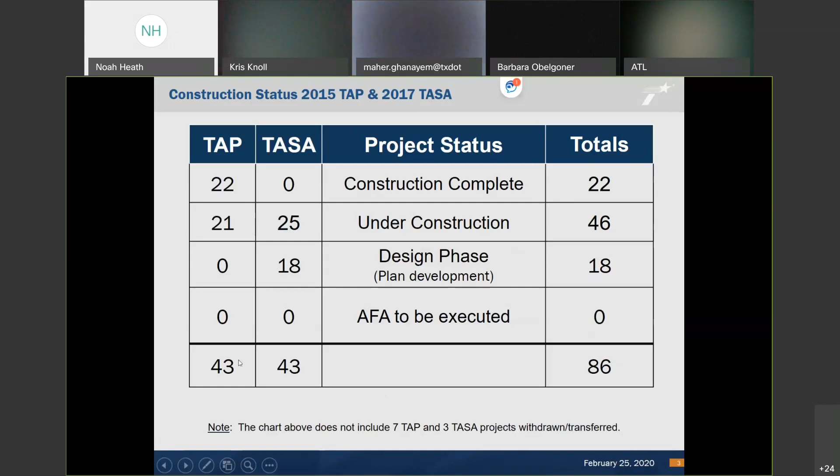Next slide. For any project that is going to let after August of this year, we need to make sure it gets into the FY 21-24 STIP. That's a new STIP, so any project that hasn't let by this August needs to be added into the new STIP.

The eSTIP portal deadline is June 22nd, and all of our projects included there must be addressed in your TIP or STIP public involvement. If you have rural TIP meetings or public meetings, please be sure these projects are individually listed in that TIP and STIP. We want to make sure the entries in the eSTIP portal for the FY 21-24 STIP match what was in the previous STIP, the FY 19-22 STIP, exactly.

We want it to look exactly like it did before because it was approved by FHWA that way, so we don't want to introduce any changes unless there was an approved modification to your scope. That needs to be captured, so let us know. We'll be reviewing all TIP and STIP entries for our projects in the 21-24 STIP and will contact you if there are questions. This is really important, especially for those of you in MPOs, to work with your MPO to ensure these projects are captured in their MPO TIP as well.

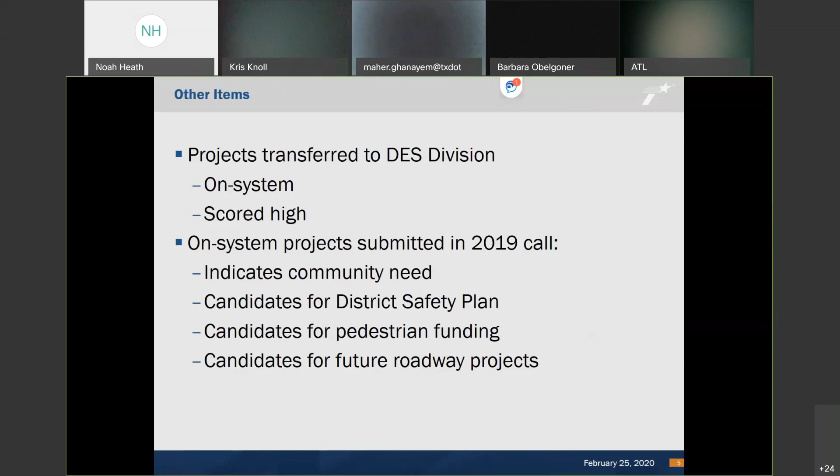Okay, I'll take it from here. This is Noah.

First, we wanted to revisit the project initiation timeline. This is the general project implementation timeline over the next year, with a target date of full execution of these projects, AFAs, by November 1st, 2020. You can see that there's some overlap. I'm not going to read through all of the items, but there's overlap for each because depending on the MPO or the specific situations of that project, it may fall under a different STIP cycle or whatever the MPO TIP deadlines are. So there will be a little overlap, but the overall target for all projects is November 1st, 2020.

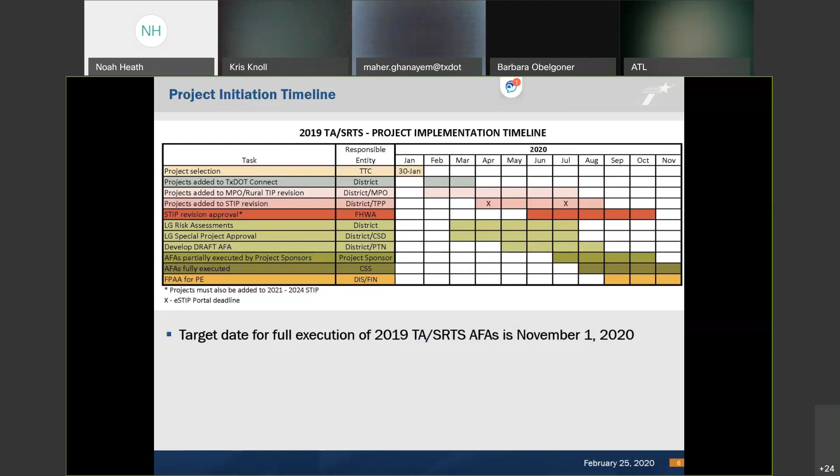This presentation is focused on the gray, so the second line, the TxDOT-Connect. So we'll be talking about how to enter your projects into TxDOT-Connect for this funding. Our goal is to have all projects entered into TxDOT-Connect by the end of March.

We'll be providing tools to help with this, get everything entered into TxDOT-Connect, and then also providing a spreadsheet, or I'll just read through each of them. We'll be providing a guidance document by the end of this week that'll go into detail. It'll be similar to this presentation, but it'll provide a lot more detail on how to enter projects into TxDOT-Connect. And then it will provide additional information for the next steps in project initiation.

So local agency project procedures, risk assessment, special approval, economic disadvantaged counties program - there's several projects that have that EDCP funding. So it'll give detail on how to proceed with those projects, the TIP and STIP, advanced AFAs, and then the federal project authorization and agreement.

We'll also, another tool that will be used when entering the projects into TxDOT-Connect is the final detailed application. We'll talk about the fields that are helpful when you're entering your project into TxDOT-Connect. We're creating a project initiation checklist for these projects, so it'll help make sure that you guys don't miss any specific items along the way. And then also we'll be providing spreadsheets that'll have the cost breakdowns for TxDOT-Connect, the STIP, and then the AFA, because they're all a little bit different and they don't quite match. So we're creating spreadsheets that will give you the numbers for your project so you know exactly what to enter in each area. And then AFA templates, we hope to have those finished by mid-March.

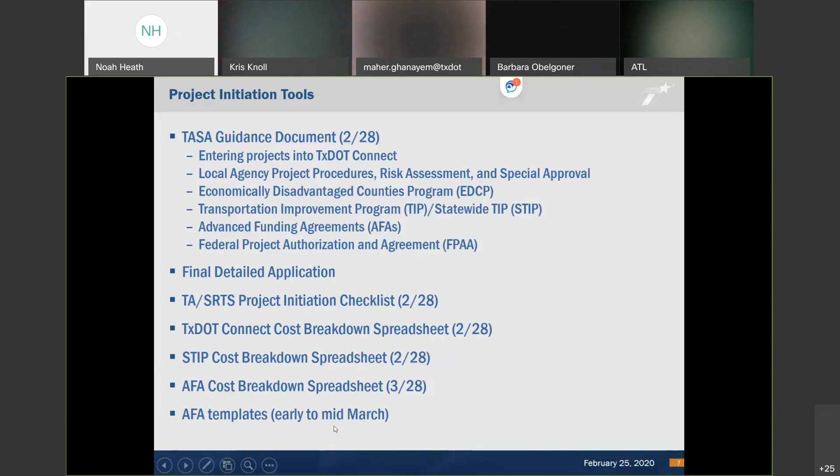So I'm just going to talk briefly about the tools that we'll use for entering projects into TxDOT-Connect. The detailed application, the important pages to look at for the detailed application is the cover page that PTN created, which has the updated project description and project name. So you'll want to look at that whenever you're entering your project name into TxDOT-Connect, and then also the from and to limits, and then the project description.

One important thing to note is to know the funding source for the project, because some of the project names actually have SRTS in the name, or Safe Routes to School in the name, or school sidewalks, because Safe Routes to School projects are a category of project under transportation alternatives. But then we also have Safe Routes to School funding for Safe Routes to School projects.

So you'll see Safe Routes to School projects under both funding sources. It's important to know that funding source and not assume it's a Safe Routes to School funded project just because it has that name in the project title. It's a bit confusing, but if you think of the project in terms of its funding source rather than its name, that may help.

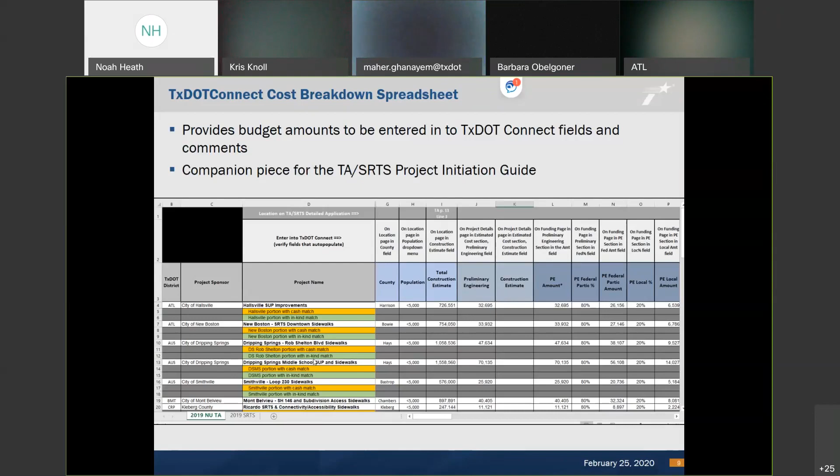So this is the cost breakdown spreadsheet for TxDOTConnect, and I'm going to pull it up so you can get a better look. There's a tab for non-urban TA projects, and another for Safe Routes to School projects. Each project is listed, and the first row shows where that information is in the detailed application, while the second row tells you which field in TxDOTConnect to enter that information into. The third row is like a column title or field title for the spreadsheet.

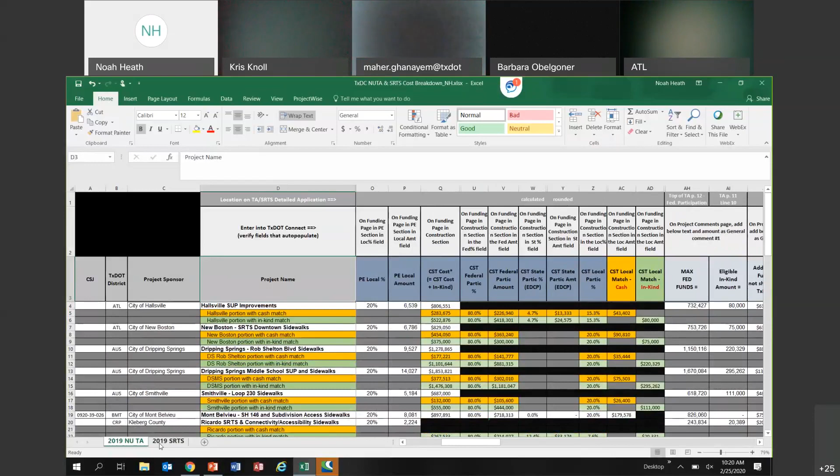You can see it has the PE amount, and if you scroll down, it'll give you, for the funding page, the field entries for each funding line that you'll enter. We're hoping this will be a helpful tool that consolidates all the information you need from us to enter into TxDOTConnect. Again, there's a tab for non-urban TA and one for Safe Routes to School projects.

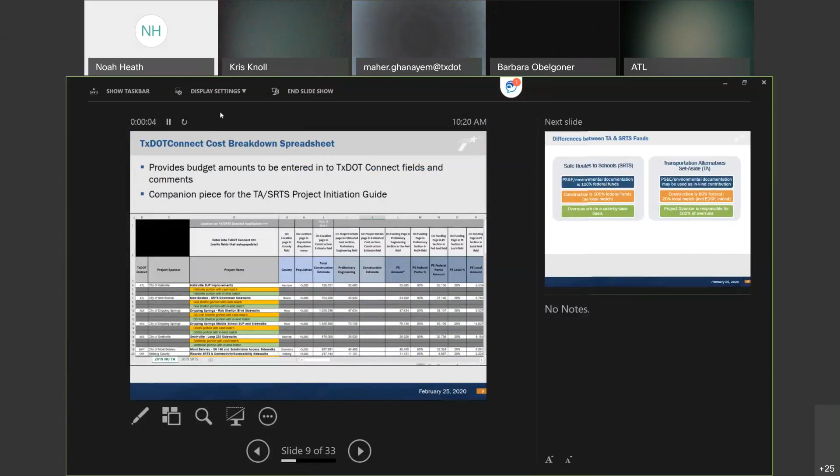Let's see if it's going to pull up the same... nope, okay. So another important note is there are differences in funding for Safe Routes to School as opposed to— here, let me move this real quick. Sorry about that, okay.

So there are key differences in funding between transportation alternatives and Safe Routes to School. Safe Routes to School allows PS&E and environmental documentation, and they're 100% federal funds, and 100% of construction, with no required local match—although a few cities did provide a contribution. We're calling it a contribution because it's not really a match, but they did provide money toward the project, so we'll talk about how to accommodate those. Overruns are handled on a case-by-case basis.

Transportation alternatives PS&E and environmental documentation may be used as an in-kind contribution. Construction is 80% federal, 20% local, including EDCP and in-kind, and the project sponsor is responsible for 100% of cost overruns. Those differences all relate to the funding page—you'll see them reflected in the funding lines when we start entering those in.

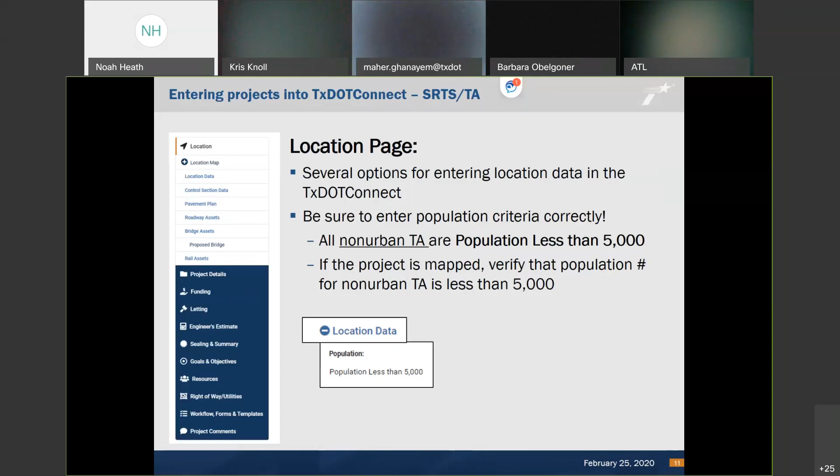So on the project details page, the important items—most of the stuff is straightforward, but on the construction estimate, you'll need to enter in the total construction cost estimate that's located on the cost breakdown spreadsheet. It's column I, titled Total Construction Estimate.

On the limits, we want to try to fit in the total limits of the project, and some of the limits are going to be a little funny because they might be on multiple streets. This example is pretty straightforward because it's on Center Street from McBrayer to Bordon Street. But if you have multiple streets that the project's on, you would want to list those. So if there's two streets, you could say on Center Street and M Street from the elementary school to Bordon Street, or something along those lines where you include all of the streets that the project facilities are actually on, and then an overall project limit that might be the first limit on the first street and then the last limit on the next street.

That's where you'll look at the project description on that cover page, and also the detailed application should have the street that it's on and the to and from streets. But you'll also want to look at attachment A, the project location map, because that might help you in creating that description. We realize it might be a little challenging because there's a limit on the number of characters you can have in these fields, so if there's any issues with that, feel free to call us and we can work with you on that.

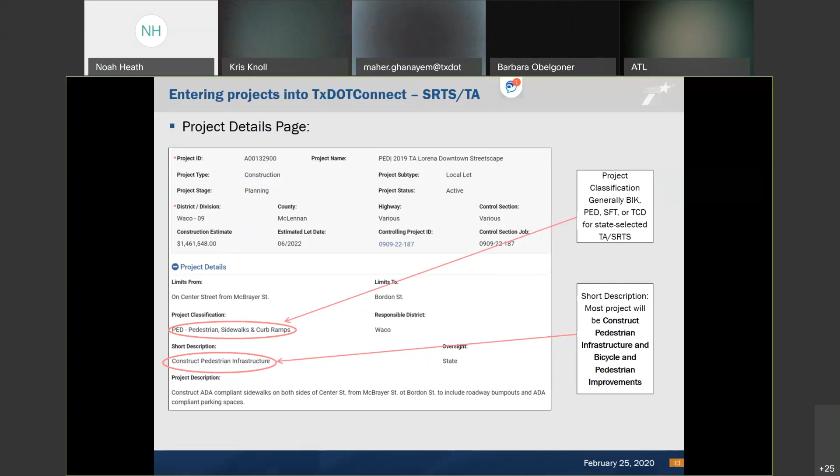So for the project page, there's also the estimated cost fields, and those items will be in the cost breakdown spreadsheet—column I, total construction cost, and column L, which is PE amount.

One thing for the STIP section in the project details page: make sure that for all projects you check construction and preliminary engineering. We'll be entering in some amount in preliminary engineering, even if the project is only funded for construction, because there's the TxDOT admin cost for review of the preliminary engineering. So there'll always be some funding amount in that preliminary engineering, and we just want to make sure that all projects have both of those checked.

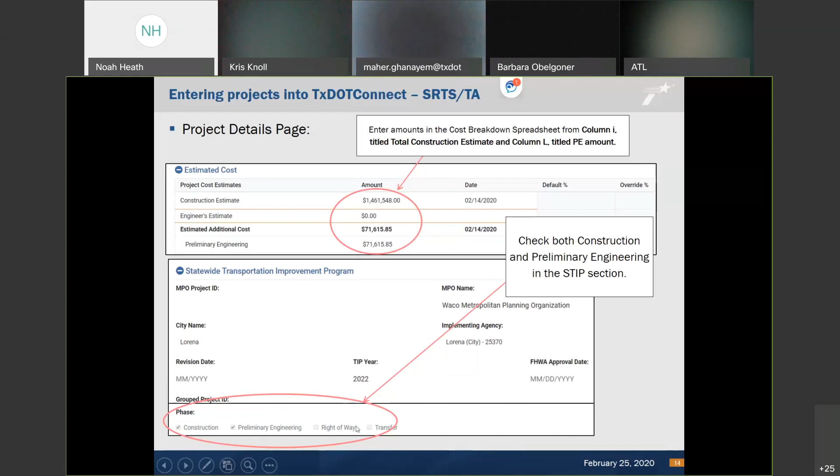Another important item for this program, and really for all roadway projects in general. We get questions about how to show performance on pedestrian and bicycle facilities. So be sure to check the pedestrian or bicycle facility box, and then add the facility length.

That's at the bottom of the project details page. If you have questions about which bicycle or pedestrian facility category it falls under, click the question mark at the top right corner of TxDOT Connect. It provides a document with a full list of definitions for each facility type, along with instructions on how to calculate facility length, since a facility may be on both sides of the road or made of segments connecting to a larger network. It gives guidance on how to enter the actual facility length.

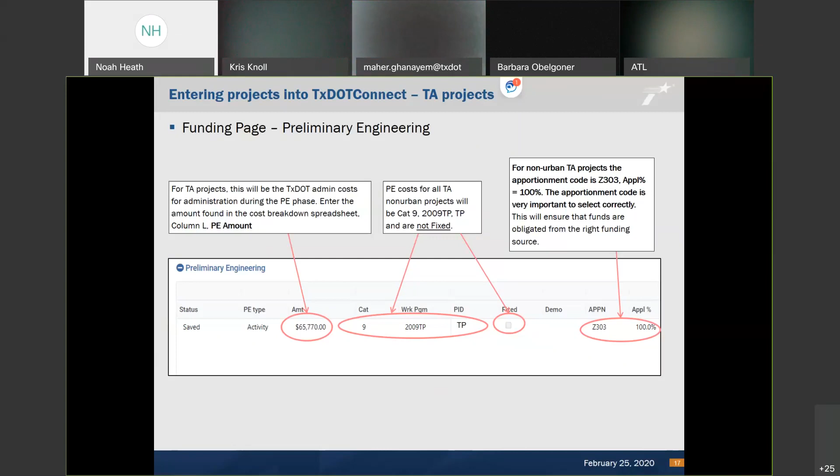For TA projects, the breakdown is 80-20 federal and local. You're going to enter the amounts, and it should break out 80-20 for you. If you click on the little arrow by the local amount, that's where you can put the local match type, which for the PE phase will only be cash. Then you can enter the minute order for the PE phase.

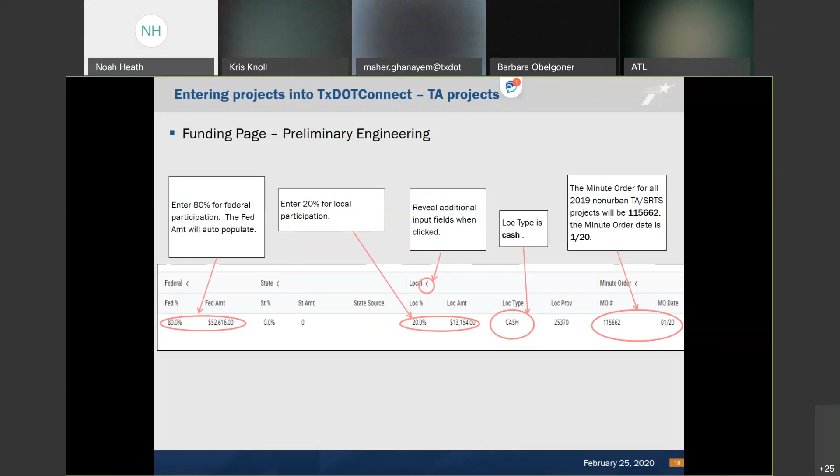For the construction phase, we can enter the amounts for the construction phase and the codes, but finance has to enter the minute order.

You'll see there are 3 lines in this example. This is a TA project that included in-kind contributions. Because a portion of the cost's local match will come from 2 sources, the local match is going to come from both a cash match and an in-kind contribution, and we can't enter both on the same line. So if we have an in-kind contribution as a local match, most of the time we end up having to put multiple lines of funding, so we have a line broken out 80-20 for an in-kind match, and a line broken out 80-20 with a cash match.

And then all TA projects and all Safe Routes projects will both have an additional cash line of local funds, a $1 cash line, an open line of funding for any overruns.

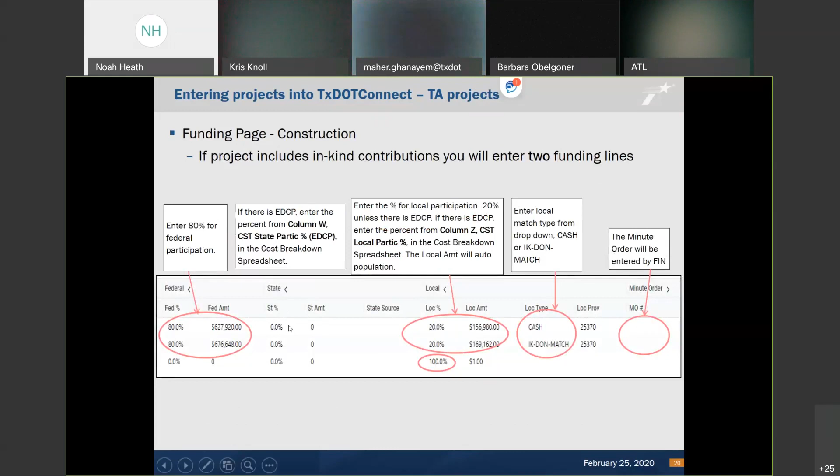One thing about the EDCP, if your project has EDCP, the local percentage will be less than 20%, and the remainder will be a state percentage. That's also broken down in the spreadsheet, so you know what percentages to enter for state and local.

Okay, I guess I'll take over from here. The letting page, one comment we wanted to make: if the districts have capacity, we would like them to consider a state let for smaller local governments with limited capacity to oversee the design and construction phases of these projects. Some of the local governments are pretty small, and it can be more work to guide them through the process than just to have the project be a state-let project.

Each district treats this a little differently, but we would like you to at least consider it, because some of these local governments could really use the guidance, or actually have someone take over the letting for them, since they don't really have the institutional capacity to handle that type of project. I will add that some districts have just made it a policy for non-urban TA to do a state-let approach on all of those, because it's so much additional effort on their part to handhold. It also creates project delay because the local entity has trouble getting together their bid documents and following all the state and federal requirements, so it's a lot easier if we just handle it ourselves.

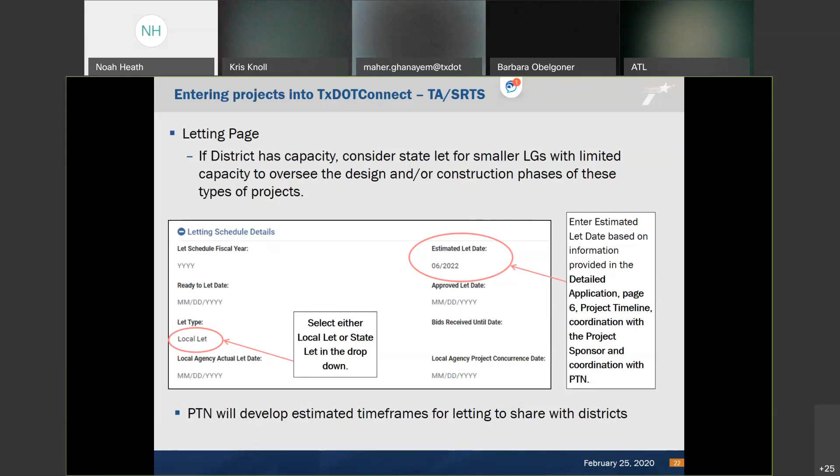Also on the letting page, there's the performance end date section. For state-let projects, letting management has started some trainings for the districts, and that training covers performance end dates for state-let projects. Those trainings are over the next few weeks - y'all may have heard about them. I think there's a training today from 1 to 2. I have a list of all the districts and their training dates, so I can send that out after this meeting.

For local-let projects, at this time they want to treat it the same as they did for the 2017 and 2015 projects in DCIS. So you'll enter a performance end date when setting up the project - this is the anticipated completion date for the project construction. You'll use the letting date that we estimate, coordinating with the districts and project sponsors as a starting point, and then try to determine mobilization and duration of construction, plus the time necessary for TxDOT's review, to come up with an estimated construction end date or completion date. Letting management can change that performance end date all the way up until the FPAA for construction is approved.

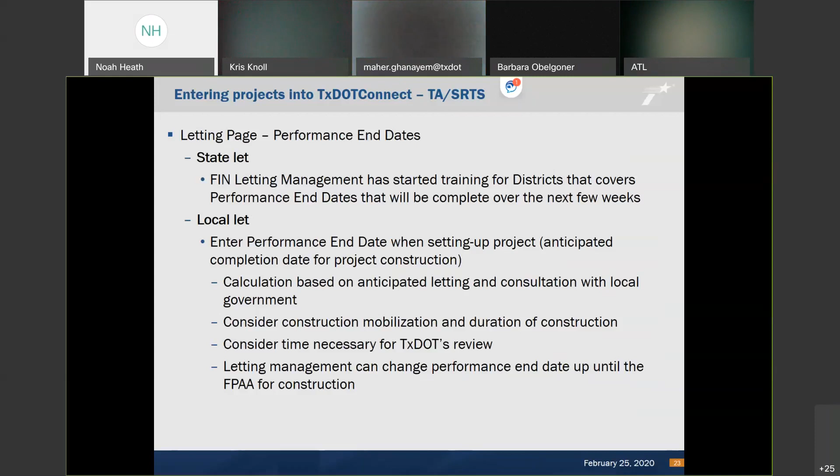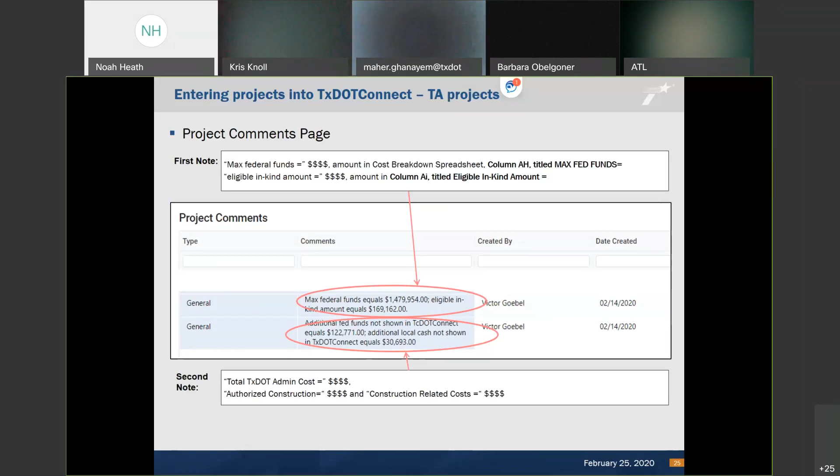So for the Safe Routes to School projects, entering these projects will be, for the most part, the same as the TA projects, except for a few items that are very important.

The funding page - for Safe Routes to School, you'll include the PE amount, and that'll be in the cost breakdown spreadsheet. This will include the amount the project is actually spending on preliminary engineering, but also the TxDOT admin cost for review of preliminary engineering.

The work program and PID are different. We doctored this slide so it shows what the actual work program and PID will be, but those are not available in TxDOTConnect right now. We got word that they're going to put those changes in by the end of the week, so they should be available pretty soon.

For preliminary engineering, it's not a fixed amount, so you won't check this one. And like Bonnie was saying, we have about 12 different apportionment codes. So we're just putting in LU20, and then finance will figure out which apportionment code will actually pull funds from, because as the projects move forward, they'll have to be flexible with that since there's like 12 different codes.

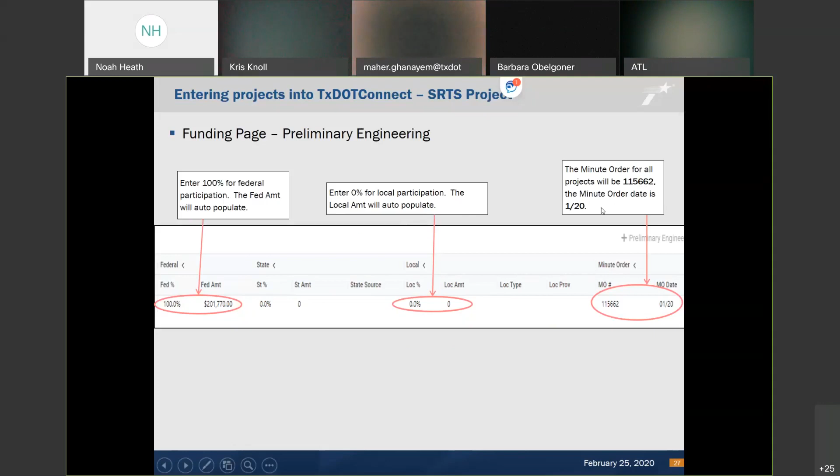So this will be 100% federal participation, 0% local, and then for preliminary engineering, you can enter in the minute order and the date. It's different for construction. Finance will have to enter in the minute order.

But for construction, you'll include the construction amount, which will be included in the cost breakdown spreadsheet, the category, work program, PID. For construction, it is fixed. And then there's also an open local funding line, for the potential for cost overruns. We want to open funding activities so that those overruns could be applied to the local government if that's necessary.

One thing to note is that with Safe Routes to School, there's not a local match. It's 100% federal. But there are a few project sponsors that provided a local contribution, and instead of entering $1, you would enter whatever amount they're contributing to the project. We have that broken down in that cost breakdown spreadsheet.

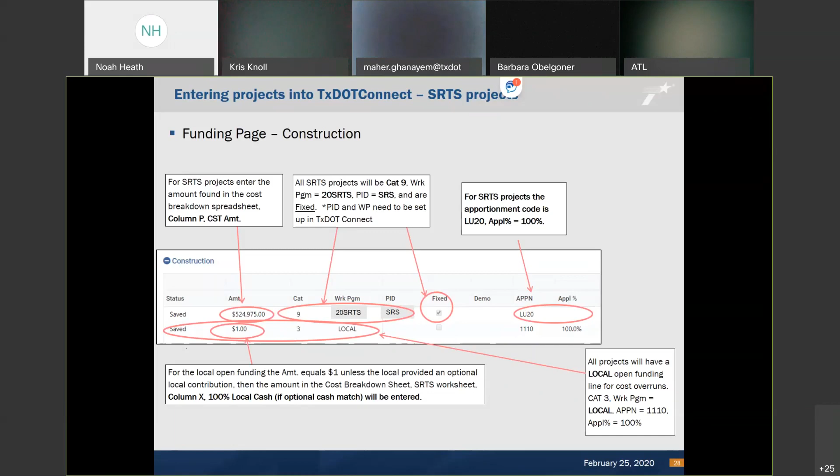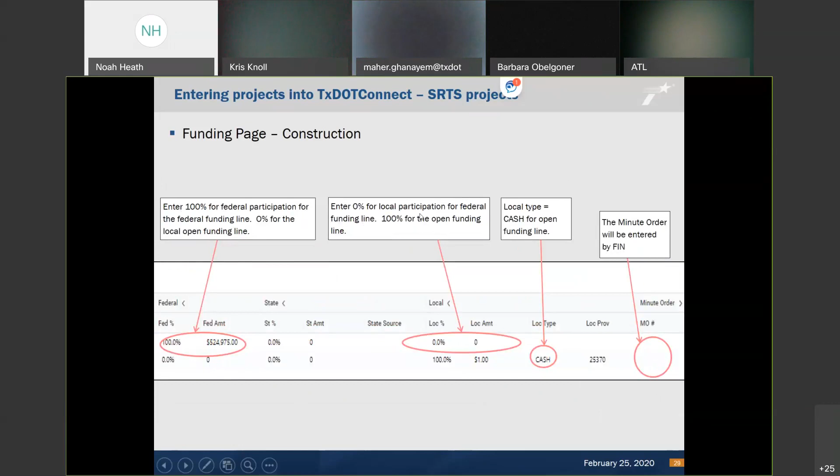The open local government activity will be a cash for local type, and like I said, the minute order will be entered in by finance. Again, for construction, it's 100% federal and 0% local participation.

And then for the project comments, we will include this information in the cost breakdown spreadsheet, but like Bonnie was saying, these are important items that aren't included as fields in TxDOTConnect, but they're important for our program, especially years down the road when you're trying to calculate how much is left, how much was the TxDOT admin fee, and different amounts. These are, from experience, items that are really just like breadcrumbs to give us clues on how to calculate overall project cost and where the project stands at whatever point in time we're looking at it.

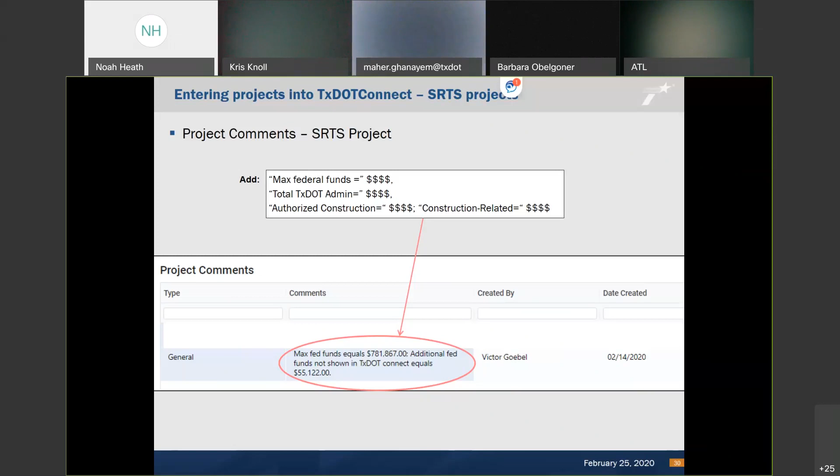And then once you have completed setting up the project in TxDOTConnect, you'll save it, and then we would like it if you would email us the CSJ so that we can review the project and make sure that it's ready to go before it's moved on to finance for their review.